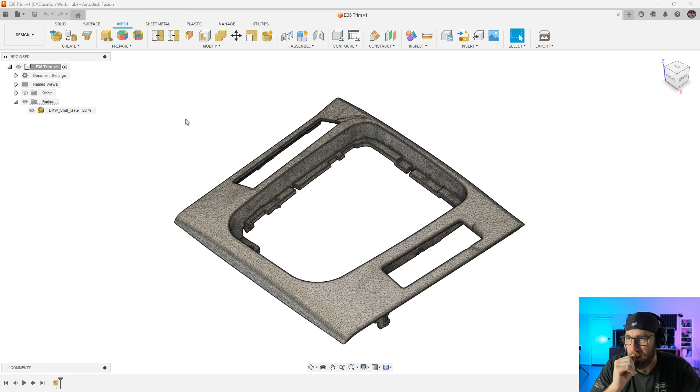If you haven't seen the first two videos, we created this using QuickSurface Personal, and the main idea here is to recreate the outside shape, basically trying to see what you would see if this was installed on the car. It goes around the shifter, and we also created the openings for the switch panels, and for the centerpiece we did some basics around it. It wasn't a full reconstruction.

The user that sent this to me is going to be 3D printing it. These pieces for E36s, as well as many old cars, just are not available, so you have to find one in good shape if you have a broken one, or if you're trying to customize it or swap in a different transmission or shifter, you have to essentially make your own. So because the goal is to recreate the part that you can see, the rest of the features are all going to be 3D printed.

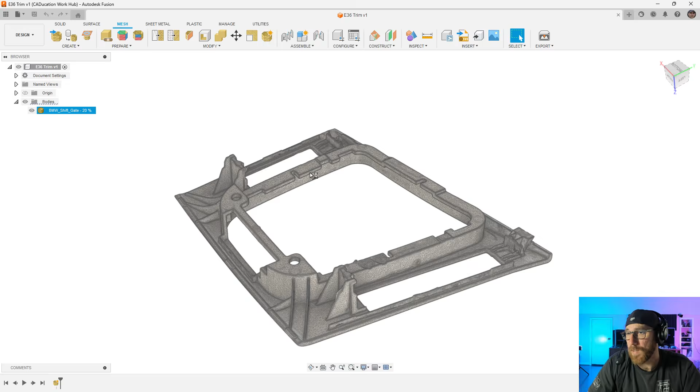We're not going through all of the ribs and the mounting features or making holes or anything like that. Most of the questions I get around this type of workflow are, one, how to get started, and two, how do we create the geometry? How do we physically make these complex shapes? Most people that reach out to me are okay with making prismatic shapes, creating a sketch, extruding, things like that, but for the most part they get hung up with the big, broad, complex curves and shapes. So that's going to be the focus of our video.

Now, for this one, if you want to follow along, there is a download link in the description of the video that has this mesh already inserted. This mesh is a reduced mesh from the one that we used in QuickSurface, so it's been dropped to 20% of the original, like 2 million polygons.

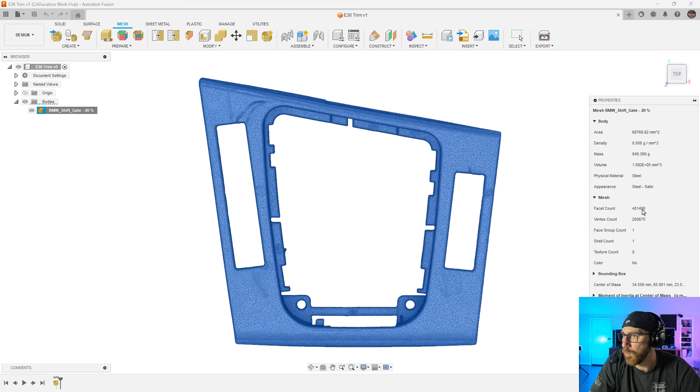And that's because it really doesn't need to be that heavy of a mesh, and since we're working in Fusion, it's much better if we have it smaller. So if we take a look at the properties, we can see we're at 401,490 facets, so basically reducing that down from the original size. It's going to make it much more responsive.

Now, if you want to, you can also right-click and make it unselectable. This will help because when we hover the cursor over, it's not trying to highlight all of the triangles. So if you've got hundreds of thousands or millions of triangles, that is really where the system gets hung up. Making it unselectable doesn't mean we can't interact with it, especially when we're working in forms, but it does mean we can't click on it on the screen.

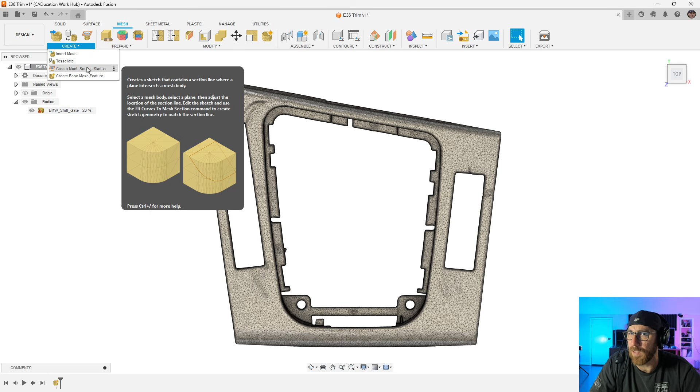The way that we're going to approach this - we've done plenty of parts with things like mesh section sketches, but we're not going to be using mesh section sketches, at least for this first part. We're going to focus on freeform modeling. Anytime I am starting with a complex part, whether I'm designing a duct, a spoiler, or wide body, I typically go to freeform, at least as a starting point, where you can snap to the mesh. It makes it so much easier, at least for me.

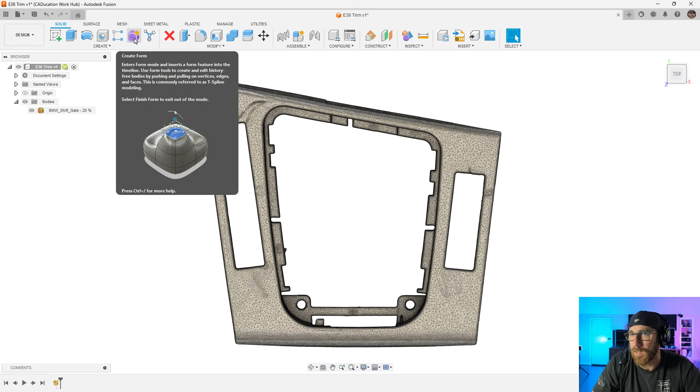You can do it with surfaces, and again, we've done videos where we've used mesh section sketches. But for this part specifically, we did it with freeform modeling in QuickSurface. We're going to do the same thing here.

So once we have a freeform body, we're going to start with the face tool and turn on Object Snap. We're going to do the same thing that we did in QuickSurface, where we're essentially looking at - in this case we don't have visualization options like that heat map we used, but we do have the density of the triangles. So we're going to essentially go out to these corners, come down to where it starts to transition, and come back over here.

All right, so this is the starting point. We're going to say, okay, this is one big panel. And while it did snap to these corners, you can see the inside is basically just a big flat plane. So what we need to do is divide this up. By default, it's not going to snap to the mesh.

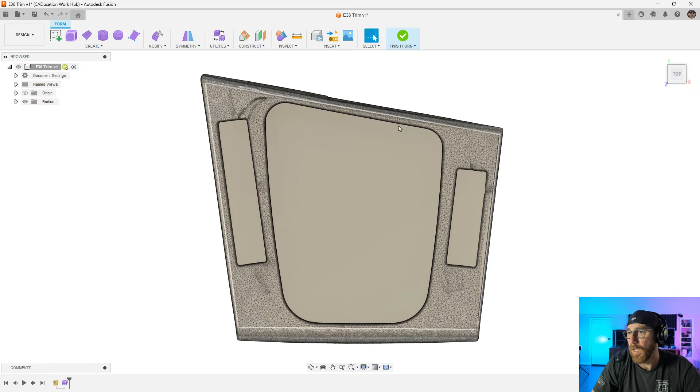We have to use a tool called Pull, and that's going to pull it to the mesh. We do have snap options when we're editing the form. You can turn on Object Snap. I have never liked the way that this works in Fusion when I'm working with meshes, so I never turn it on. You can experiment with it. It might work if you're trying to move points around very, very slightly, but in general I don't use it as a workflow. So what I'm going to do is select Modify, Insert Edge, and select this edge.

This is going to put a new edge right in the middle. We're going to say OK. Then I can use the Pull tool, and I can select these points.

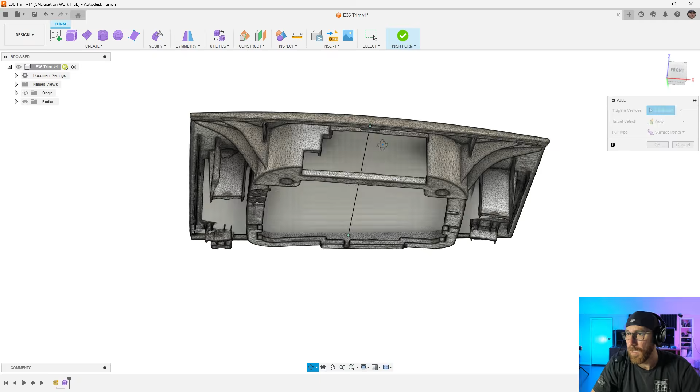Now, the problem we're going to have is the way this is designed, or the way it's divided up, it's going to snap to something underneath, and that's not really what we want. QuickSurface will automatically snap to a part or portion of it that is closest to our viewing angle.

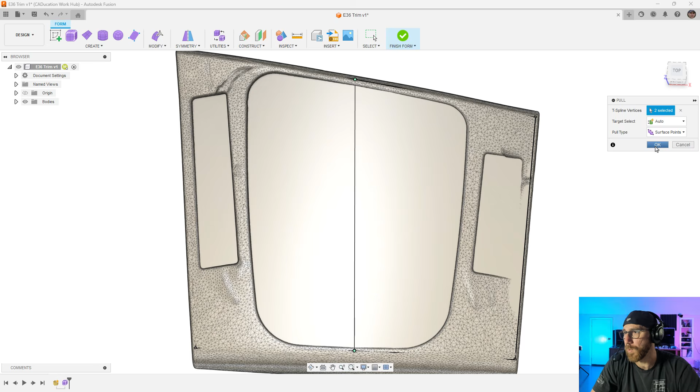Fusion doesn't do that. So what we have to do first is pull this up above, and then we can go to Modify and Pull, and it'll snap it down. Again, we want to make sure it's on the top. That looks pretty good. Another thing we can do here is subdivide.

Now, when we subdivide, we need to select a face. We can determine how many divisions we want. At this point, let's say 3 this direction, 4 in the length. Probably a bit overkill, but what I'm looking at here is it's actually giving me these points that are going to be on a section of the mesh we have on both sides.

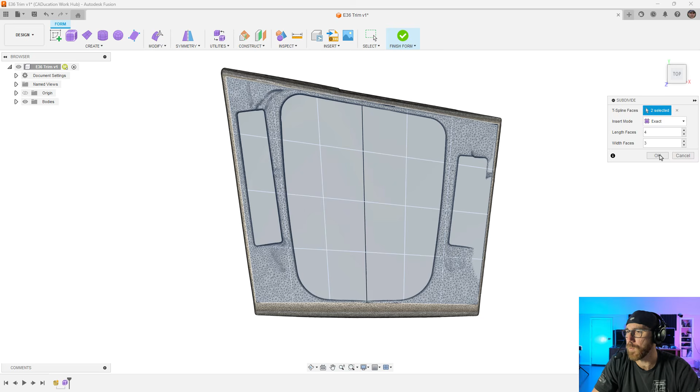Next, I'm going to go back to the Pull tool and pick the points that I want to come up to the mesh. Now, once again, this can be problematic depending on where those points are.

If they're really far below that face, we might need to go back and manually move them. In this case, it looks to be okay, but we can pull up all of these points, make sure that they're all, even the corner points, lined up. And you can do a box selection—you don't have to manually click on each one.

I'm manually clicking on them just to make sure I know where all the points are. But we can see here now we've got all the points around, and it looks pretty good. And we can say okay.

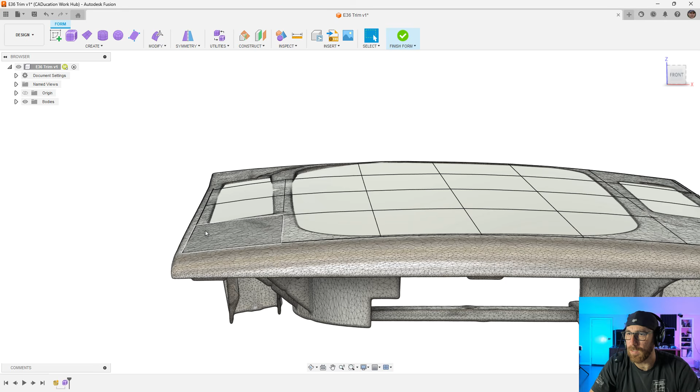Now, this doesn't mean we've got a perfect replica of the shape. You can see it's actually a little bit low. It looks pretty good here, but you can see it's low here because these points ended up snapping to stuff that's below the mesh. So what I need to do is come in and manipulate this.

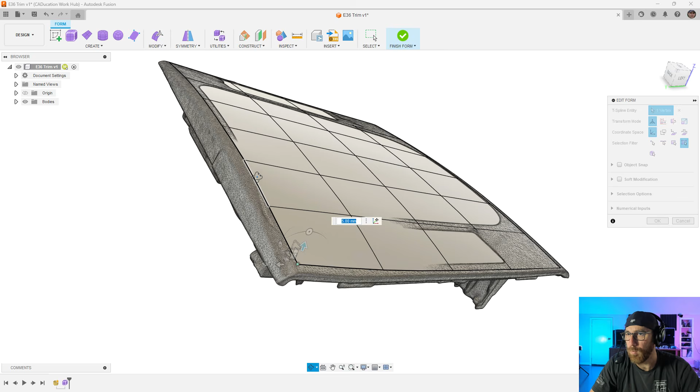Now, I'm going to give you a word of caution here. The more you manually manipulate these points, likely the further you're going to get away from an accurate representation. This face right now is pretty accurate. There's a high spot or a bump here, so it looks pretty low there, but I think overall it's okay.

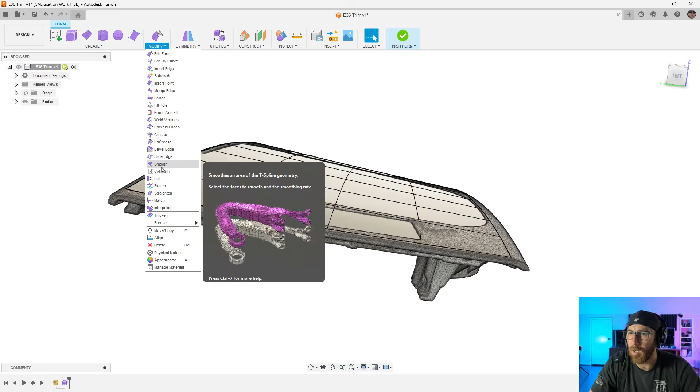But you want to avoid manually manipulating individual vertices if you can help it. You can't always help it, but it's much better to do this when you've got a lower polygon model. What I mean is if you've got fewer faces or fewer divisions, it's going to have less of a local impact on the shape.

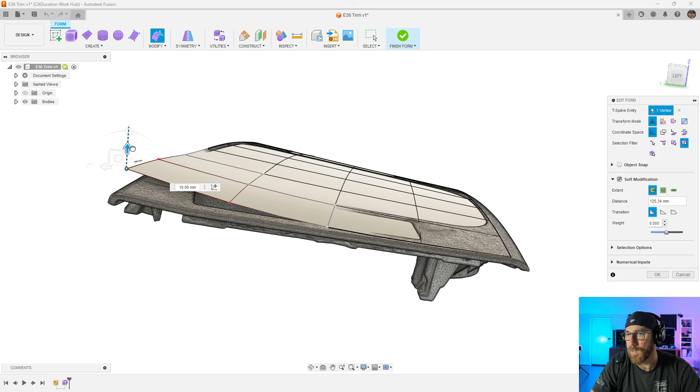Now, there are options where if you go into Modify and turn on Soft Modification, and let's say I select this vertex, it's going to change the color of the other ones and gradually move them. This is a better option in terms of keeping a gradual transition of the shape.

In general, the workflow—and I think I've done a video on this—but in general, the workflow is to start with the fewest number of faces possible, get the general gradual shape, and then add to it or manipulate it from there.

The next step is to carry on with the freeform model, unlike in QuickSurface. Part of the reason is that freeform tools work differently in Fusion. That doesn't mean one is necessarily better, but matching curvature in these corners requires a very dense set of edges, which is trickier and has a negative impact on the form inside QuickSurface. So in QuickSurface, the better option is multiple surfaces, whether freeform, a loft, extrude, or whatever the case is.

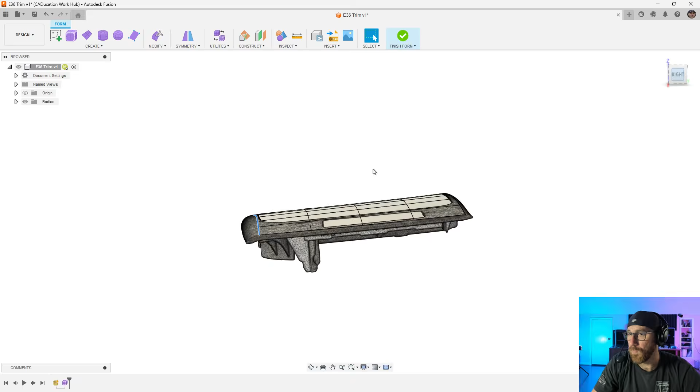Now inside Fusion, what we're going to do is select that edge, go to Modify, Edit Form, and start to extrude this by holding down Alt and pulling this edge down.

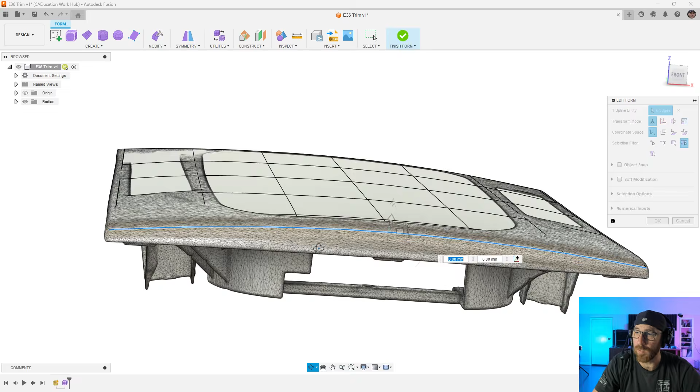Before I get too far into this, as we transition around the corner, keep in mind you're likely going to want to change the orientation of the edge, meaning you might rotate it. That's what happens in reality as you round these corners - the edges don't just slide down, they rotate as they go. This means we'll end up getting kind of far away from the shape, but we'll fix that in a little bit.

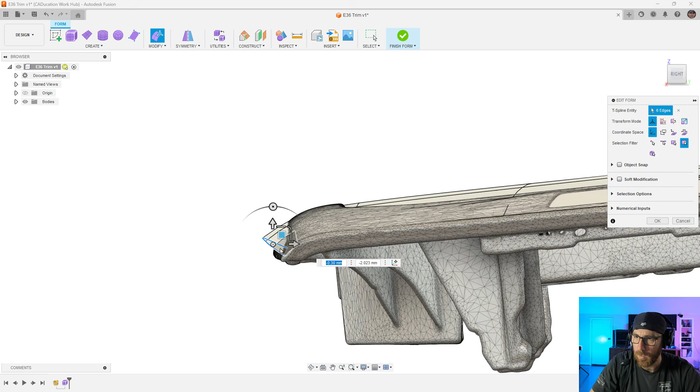I'm going to hold down Alt again, pull this out and rotate it like that, pull it down. You can see it starting to get pretty far away. So before I get any further, I'm going to say okay, and go to my pull tool.

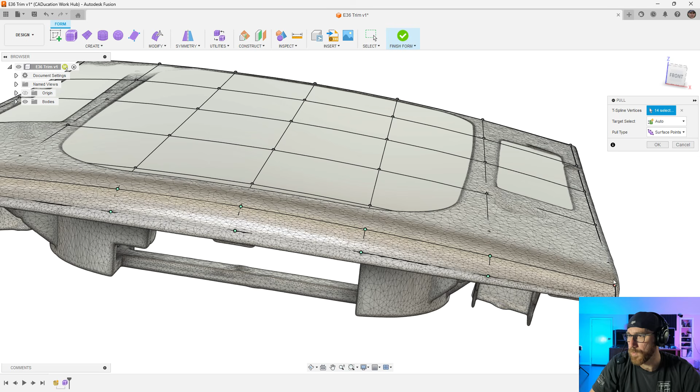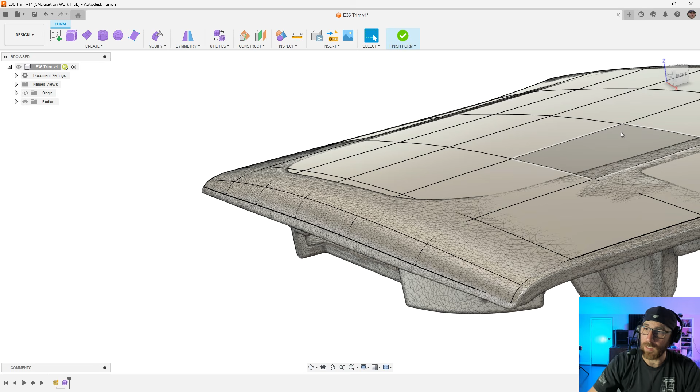I'm going to pull that as well as the second line of edges I created, so I need to find them. Hopefully they're not too far below the surface, meaning they'll rise up to the surface we want. You should also go back to the previous set of points, assuming they're still on the surface, and pull those up as well. The reason is that curvature in freeform models isn't defined just by the edges we create, but also the edges next to it control the curvature into and out of it.

So we need to go back and add another edge. I'm going to hold down Alt again, pull this one down. I'm going to use the vertical scaling to get this to be mostly flat, making sure it's outside of the mesh. We're going to say OK.

While it's still selected, I'm going to go to pull, and you can see that it pulled that down. We can also, because we added more edges, go back to the previous set and pull those out. You shouldn't have to go back more than one set of points - you can see these are still on top, but if you feel like you need to, it will adjust them very slightly. If you're trying to be as precise as possible, you can go back to those as well.

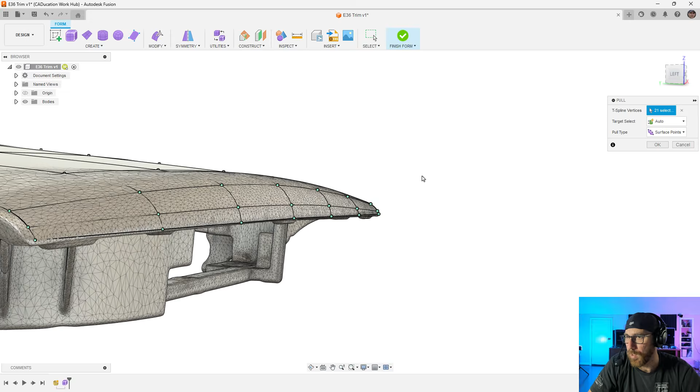We're going to say OK, and now we've got a pretty good representation. So in the bodies folder, if we hide the mesh, you can see curvature-wise, that looks pretty good.

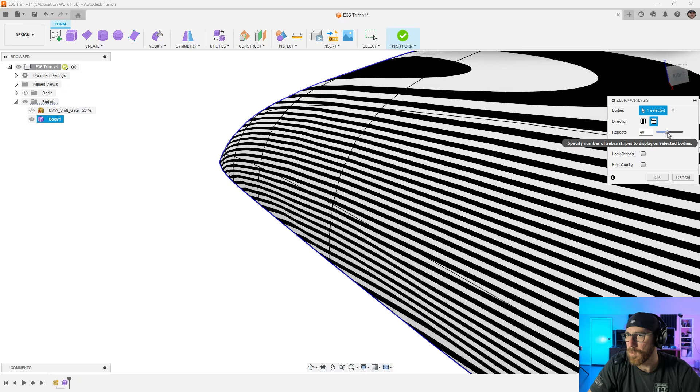So if I turn on zebra stripes, and let's flip the direction here - if we turn on zebra stripes, you can see that, let's go ahead and turn up the repeats a little bit, and high quality. You can see that there maybe is a little bit of wiggle that happens here. What I mean is when we see a narrow section and a wider section, it means the curvature is changing in those areas.

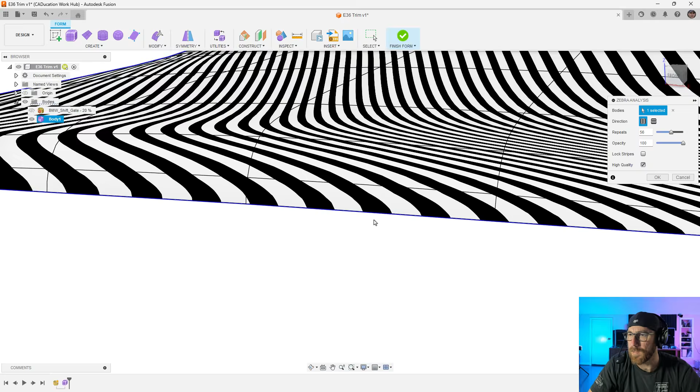We can kind of see it in this direction, but it actually looks pretty okay in that direction. I'm going to hit cancel because I don't want to keep the zebra stripes. Essentially what we're trying to do is get those edges to roll around, so I think that looks pretty good. On the other side, it's going to be a bit trickier because we've got this rounded section and then this flat section.

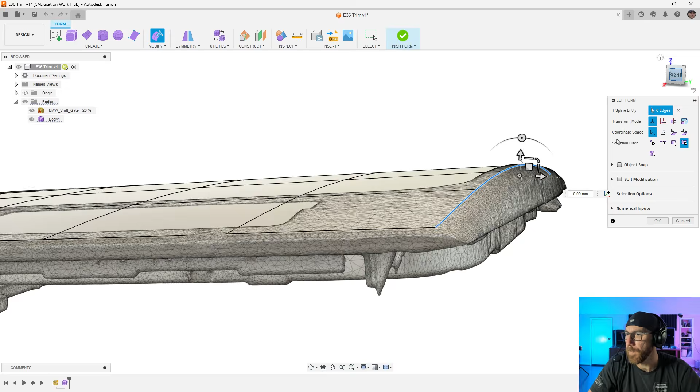So again, double click the edges, modify. This one is going to require us to do it, and we're going to need more edges to be accurate here. So what I'm going to do is start by holding down Alt, pulling this one out just a little bit, let go and hit Alt again, pull it out again, rotate just slightly, scale it a bit, and pull this down.

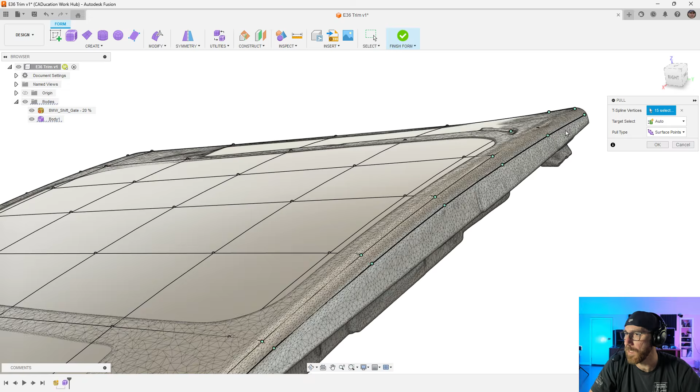Before I go any further, not necessarily required, but the more you do this, the fewer times you're going to need to stop. As we're learning and playing around with this, I find it's helpful to stop at different times through the process and just pull it back to the mesh. The main reason is because this gives us a pretty good idea of how close we are. Now, I will say that it pulled this one down into that little gap there.

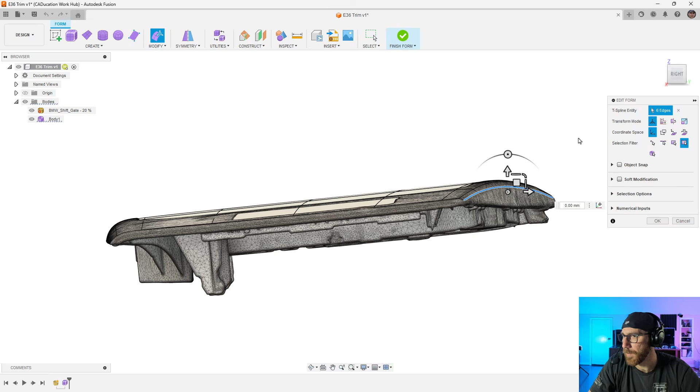So I'm going to deselect that because I actually don't want it to pull that down so far. So I'll say OK, and then double click that edge again, go back to edit form. Edit form is also on the right click marking menu at this sort of 1, 2 o'clock position up here, so if you do like to use the marking menu, it is there.

So I'm going to hold down Alt, pull this one down. Because that fillet starts to transition into more of a flat face, what I'm going to do is start to scale this and then pull it down some more.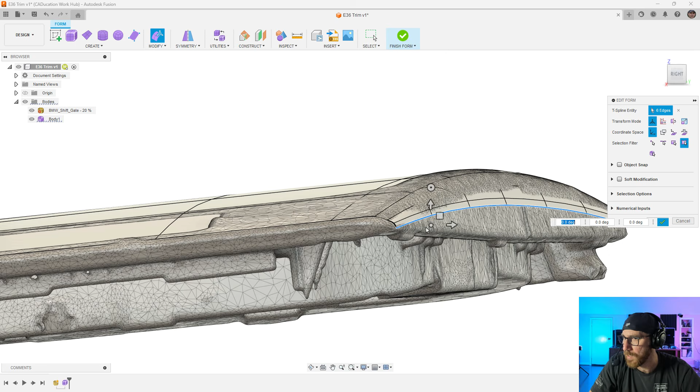Again, I'm going to hold down Alt. This one is going to be a very small change over here, so what I'm actually going to do is set the pivot point right there, and scale this down vertically until almost 0. I'm not worried about being too precise here.

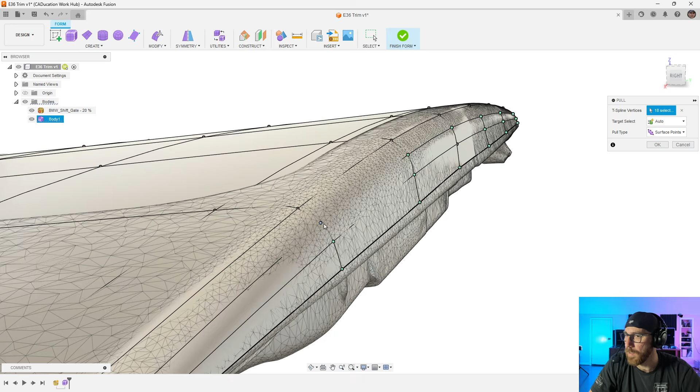But then I'm going to go back in and again use the pull tool. Now, if you use the pull tool often, it's a good idea to put it to a shortcut key so you don't have to go back into that menu all the time. But for us, it's okay to go back into the menu. It also builds a little bit of muscle memory and slows us down a little bit, so that helps. I'm going to go ahead and just grab a couple of these points.

Again, you don't necessarily have to go back this far in terms of number of edges, but it looks pretty good. Now, we could carry this down a bit further, we could move the outside edges out a bit farther, but I'm not too worried. I'm not trying to do a perfect replica of this because I just want to make sure we understand the general workflow.

If you are making a part like this, we can get 90% of the way relatively quickly. That last 10% is where all your time is spent. So if you're trying to massage a freeform model to be more accurate, or trying to get all these little nuanced features, that's really where you spend most of your time, and this is true whether you're modeling an entire car or just a part.

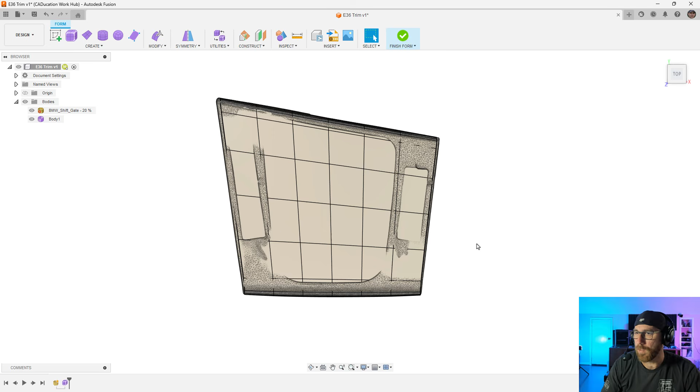You could spend, just in a general sense, 2 hours to do the entire outside of a car body, and you could spend 200 hours doing all the details, the trim pieces, adding the details for a grille and all these extra features. And I'm not even talking manufacturable, I'm talking basic stuff.

All right, so before I go too much further, another thing that I like to do is when I have a general freeform shape, because remember these are direct modeling, what I generally do is copy and paste it. So Control C, Control V. So if I need to try to subdivide this more, extend it out, or thicken it, I will do it on a copy, that way I always have that original.

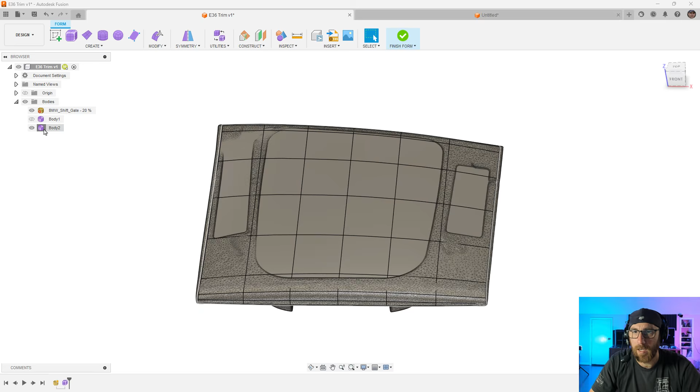Now, if you end up making changes to this, you can always add another copy, delete them, whatever you need to do, but that's a good option here. Another thing to note, which is kind of helpful: if you have this body here and you copy it while in another design inside of a freeform model, you can actually paste it into a new design as well.

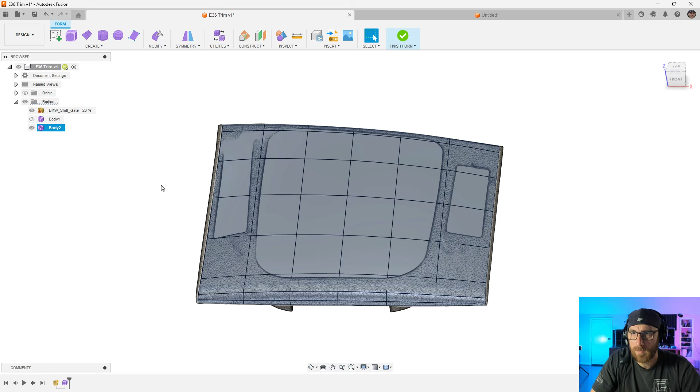Again, because these are just bodies with no history, even though it's a feature in the timeline, you can take those freeform bodies, copy them, and paste them into a new version, a new file completely. So that can be pretty helpful in some cases. Most cases, it's not super duper helpful, but in some cases it can be.

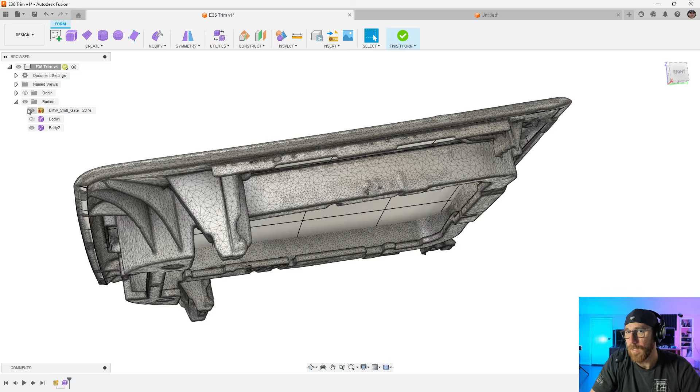All right, so I'm going to go to modify and thicken, and I'm going to thicken this inward. Let's go ahead and do 3.7. You might be thinking, why would I thicken it here as a freeform model instead of thickening it as a solid body? Well, the big reason is when we thicken stuff like this, the corners are going to start to overlap. And when we do this as a surface in the design workspace, we don't really have good control over what's happening on the inside.

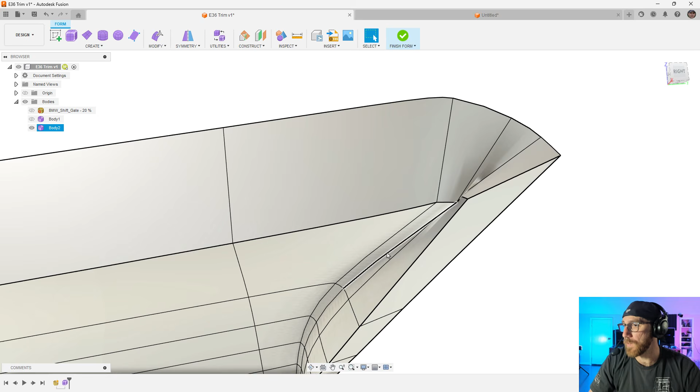Because I know this part is destined for 3D printing, I can actually select edges. So for example, this edge, let's go over to here, Control, double click that and hit delete. That will allow us to remove edges on the inside. And let's go ahead and move this edge, maybe move this edge down a little bit. And then let's go ahead and move this one. And so what this allows us to do is make the curvature work.

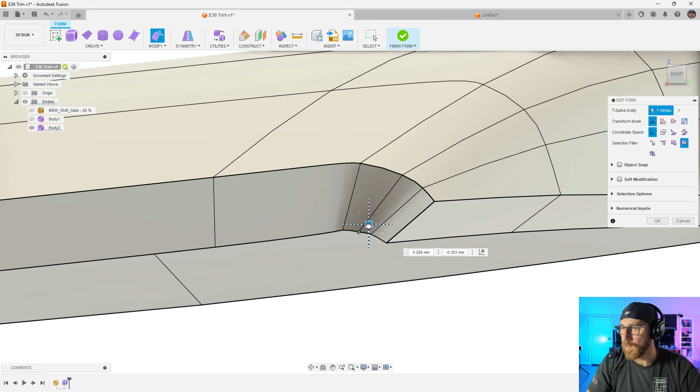So we can make adjustments here. Let's go ahead and pull these down. It's also good to go into box display, so that's Alt and 1 on the keyboard. This can really help when we're trying to sort out the curvature like this. Go ahead and pull these down and go back into smooth display. And so we can work with it so that we don't have these areas where it's pinching in those corners.

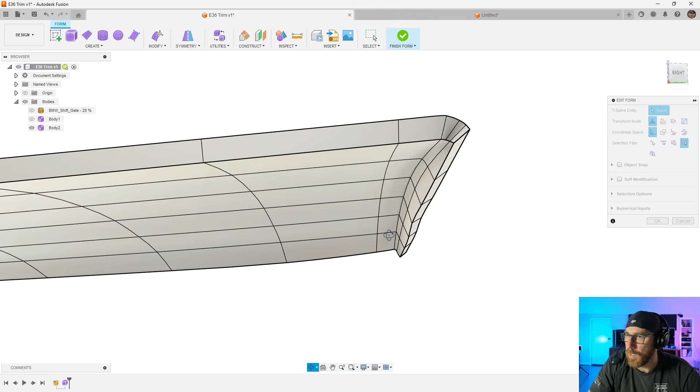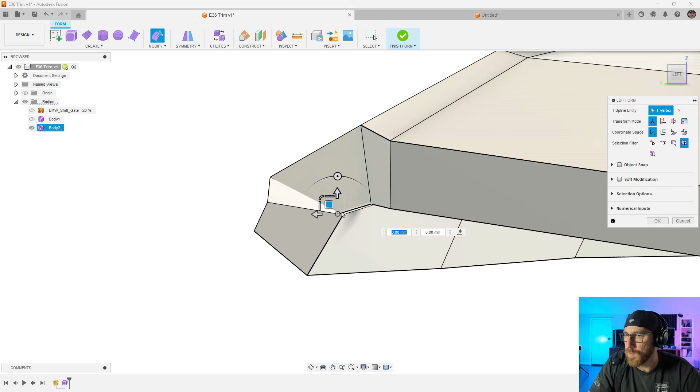And that's something we can do on the other side as well. So I'm going to come over to this side. I'm going to go back to my box display. Again, box display, this is a really good skill to learn, modeling in box display, because this can really help find some of these potential issues just based on the way that it looks in box display.

So I'm going to go and pull that one out. And you pull this one up a little bit. And then in smooth display, we can see it looks pretty good. Now there are some issues like with this. Now in reality, this actually rolls under like a fillet on the real part.

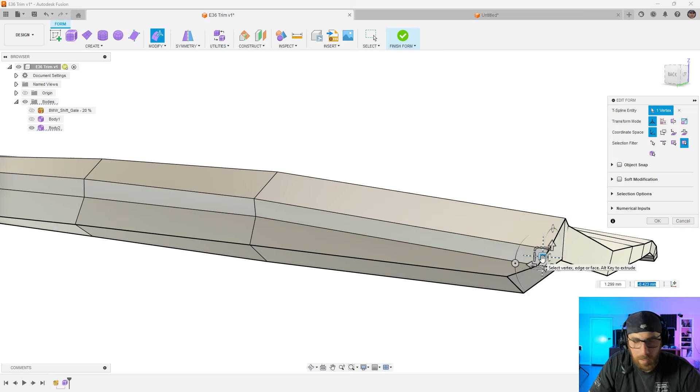And so that's something we can also do here. Go ahead and pull this in. Again, go box display. Box display will really help highlight where the edges should be. Go back to smooth display, and it looks pretty good.

Now this is a creased corner, so we could actually go in and apply a fillet there. Now, if you really wanted to, what we could do is select that and uncrease it and round it off. And so that way we could have a smooth transition of that shape.

So if you've got the mesh model here, and again, I'm kind of inside where it is, but if you've got the mesh model here and it does round off in that orientation, then you can do that. In this case, I'm going to do Control Z and undo and leave it sharp, and I could put a small fillet on that corner when it converts. But that's why I wouldn't thicken as a freeform model, because the radius of curvature in those areas will oftentimes lead to issues when you thicken, because it'll bunch up in those corners.

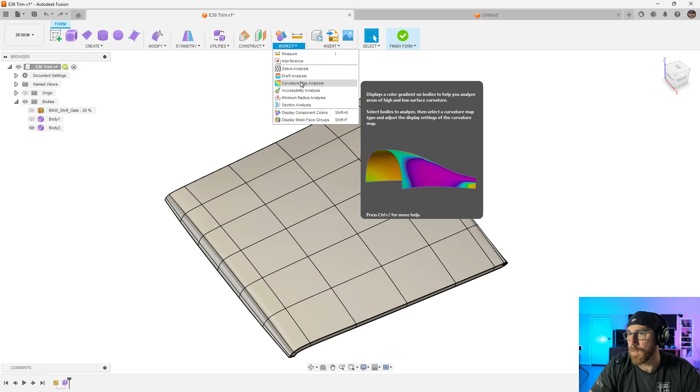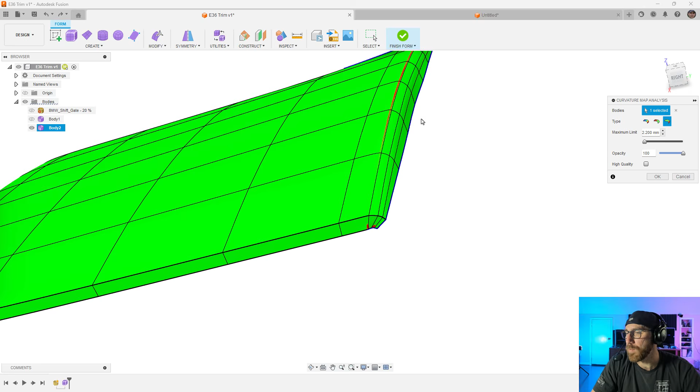And I get a lot of questions like, how do we know this? How can we figure this out? Well, if you go to Inspect and Curvature Map Analysis, and you go to the Principal Maximum, so if I set this to 3.7 millimeters, at 3.7 millimeters, we can see red in these areas. And these are the areas where it bunched up when we thickened it, right? Below 3.7, if we went to, let's say, 2.2, that would, in most cases, be perfectly fine and not produce any issues. There's a little bit of red on that corner, not a big deal. But you can see here, really just right on the peak of that is where we might potentially have problems.

And so this is the tool that I use to help find that stuff. And you can kind of figure out what thickness you can get away with. Now, in reality, again, you need to spend time making sure all these models are smooth.

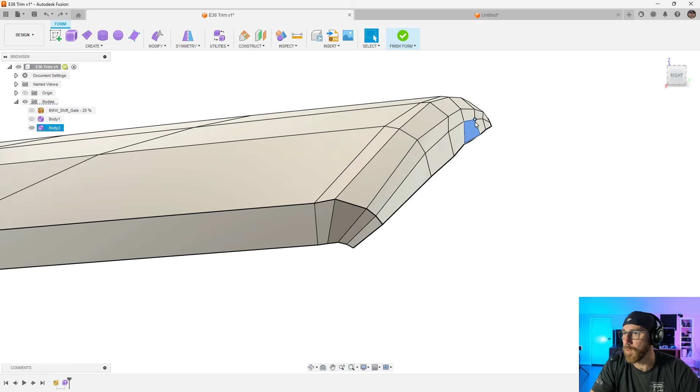I didn't spend a ton of time making sure that the curvature was really nice in this area. So when I look at this in box display, I can see all sorts of problems with these edges, kind of coming in, then back out. In reality, I would want them to be a little bit smoother of a transition. And when I look at it in smooth display, that looks a lot better.

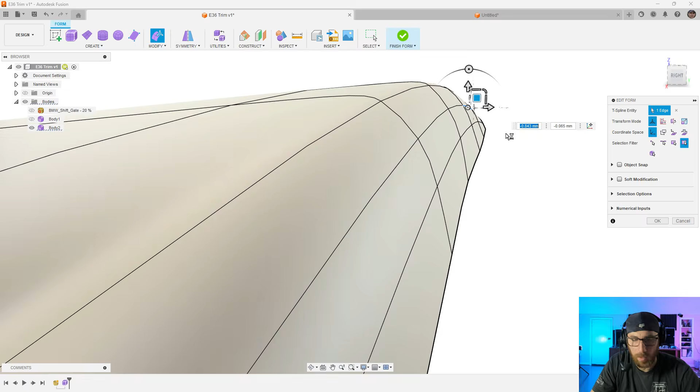Going back and forth, understanding how box display works, and being able to make these changes and manipulations to your form, that's going to be the way you get good quality geometry and good quality results out of these freeform models - spending the time. In reality, I would do this before I thickened it, but just for the purposes of this video, I'm not going to spend too much time trying to get it perfect.

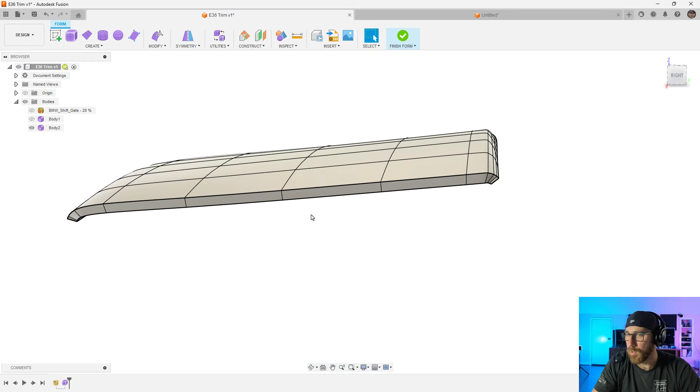This is that 90%, or maybe even 80-20, where you can get pretty far quickly. But once you start to dive in and really try to hone in and highlight the good geometry, good curvature, and make sure these transitions are all good, the thickness is nice and consistent - that is really where you're going to spend all of your time making these kinds of models work.

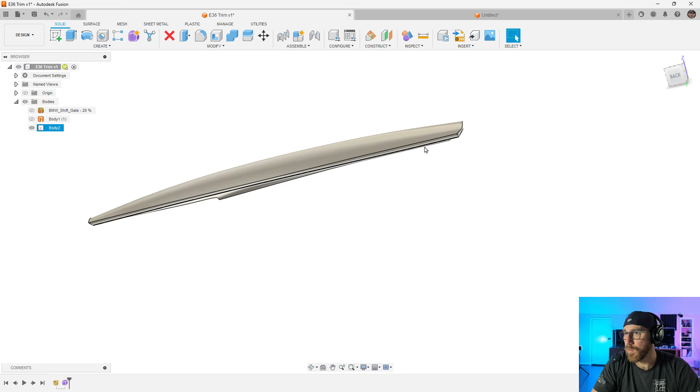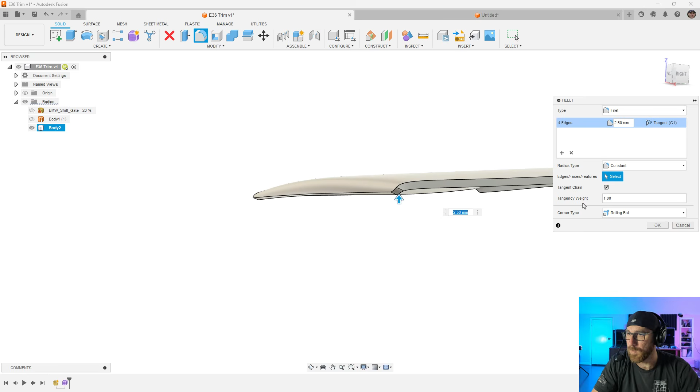All right, so now I'm going to finish the form. I've got a surface body for the top, because we copied and pasted it, and a solid body that was the thicken. So if I wanted to, let's say I left that corner kind of messed up - if I wanted to apply a fillet there, I could do that. If we needed to round off that corner, maybe this corner as well. Within reason, obviously there will be a point where some of these things fail, but you can see we can round those off, and that helps smooth it out.

Now, in terms of the rest of the model, this is again where we have to look at it and figure out how we want to approach the geometry - whether it's an extrude like we did for QuickSurface, or if we want to make a freeform body snap to the inside of that, which takes quite a bit longer to do, but you could do that. You can also eyeball it, depending on what's going in here, how the shift boot fits, and all that kind of geometry. You might get away with quite a lot just by eyeballing it and getting close.

Now, that's not to say that in reality, in production manufacturing, you would do that. No, that's certainly not the way you would approach it. But if you're trying to make a custom part for 3D printing, making it fit the outside shape is the most important thing, and then the rest of it is you customizing, figuring out what you want to do.

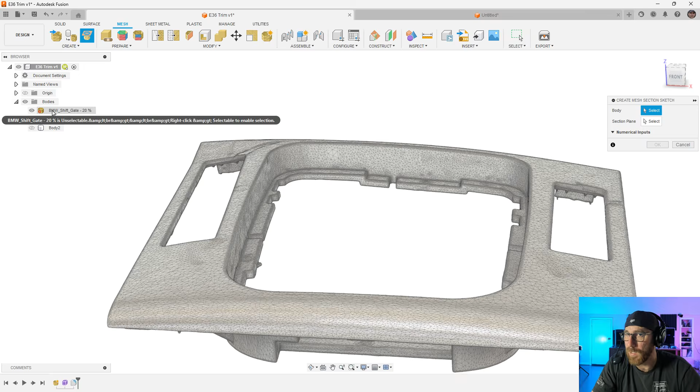Now, the rest of the process is relatively the same as we did. I'm going to go ahead and make a mesh section sketch. Again, we can't select the body on the screen because we made it unselectable, but you can select it here. The plane that we're going to use - I'm going to select the top plane, and pull this up just like we did in QuickSurface.

Now, this could be a problem based on the orientation I have my part. You can kind of see it's tilted up based on that bottom plane, so this isn't going to work unless I rotate the plane, which I can do directly here. And then again, what I'm looking for is basically a good, clean sketch. So I'm going to say OK, and it's going to create my mesh section sketch.

We don't automatically go in by default and edit - we have to right click and edit the sketch. I'm going to hide the mesh. I don't have a good way to clean this up, but we do have the option to fit curves to mesh section. So what I'm going to do is start with a line, and snap a line from there to there. I don't really have a good reference down here because, again, it's kind of missing.

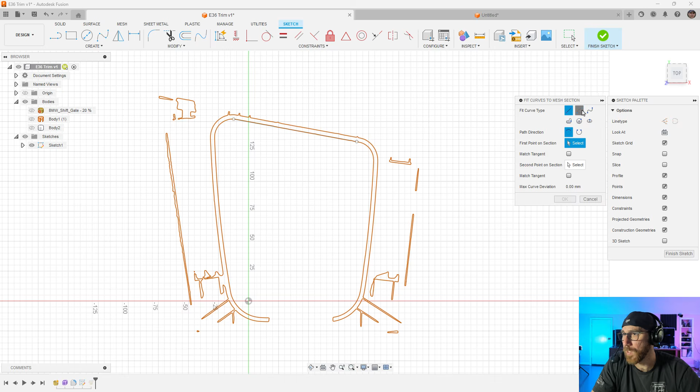But what we can do is fit an arc if we want to. So, for example, let's say arc - I'll go from maybe here to here. You can see it fits in the corner.

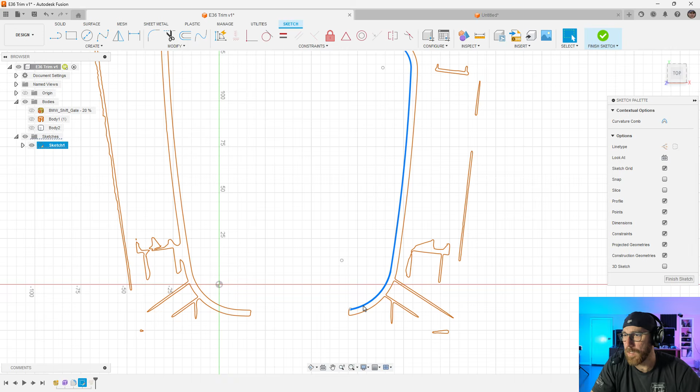And then now we've got that big arc. So basically fit to there, fit to there. Now, from here, what we're going to do is say OK. And what we've created is, let's double click that.

So now what we've created is essentially this. We don't have tangency, so if we need to add tangency between these, we want to add them. And then we can go back to fit curves. Again, what we'll do is an arc from here to here. We'll come back later and connect those together.

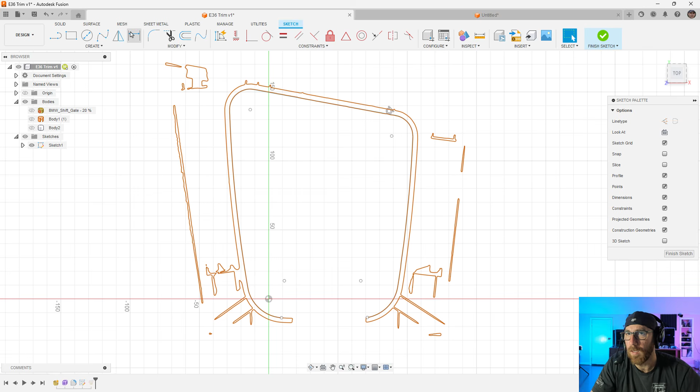Arc to there, arc to there. We'll say OK, and then the rest is a straight line. I'm not going to snap it to the mesh, but you get the picture. And then again, you can come back and let's hide the mesh section.

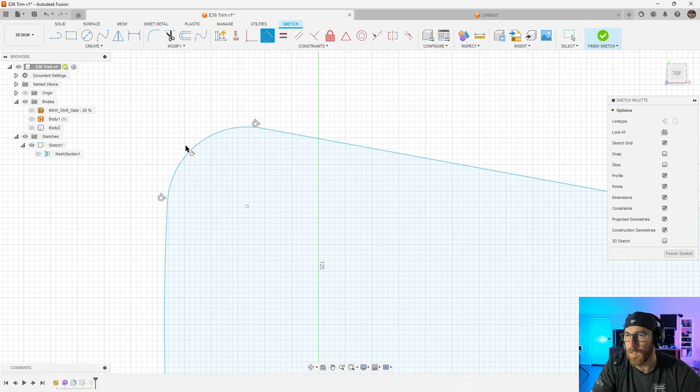And let's make these two connected, and we'll make them tangent. Make sure that these are tangent. So you can see it's not automatically applying the tangency, which means we're likely going to have to make some adjustments. So if we bring the mesh section sketch back, you can see once we applied the tangency, it kind of changed things.

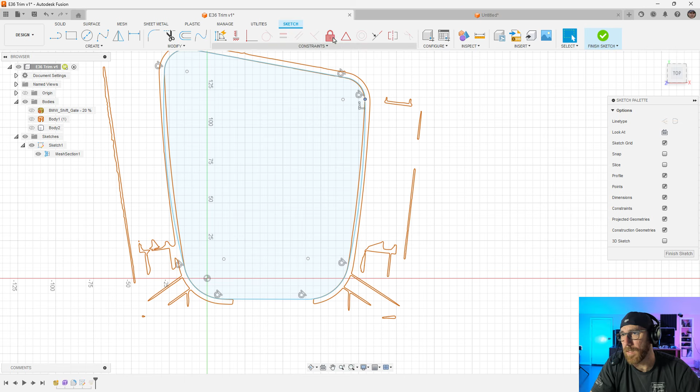The way that I would approach this in Fusion is I would find a point like this and fix it. Then from here, I would start to manipulate the arcs if possible, either manually dragging them or with dimensions. Now it's a little tricky because of that tangency.

So let's go ahead and unlock that, and maybe let's pull this. Let's go ahead and pull this back. Get it close. And this is an area, again, where I think the process is much easier in QuickSurface than it is in Fusion, because once these sketches start to get messed up, it becomes really hard to do. So go ahead and pull that up and maybe give this a dimension.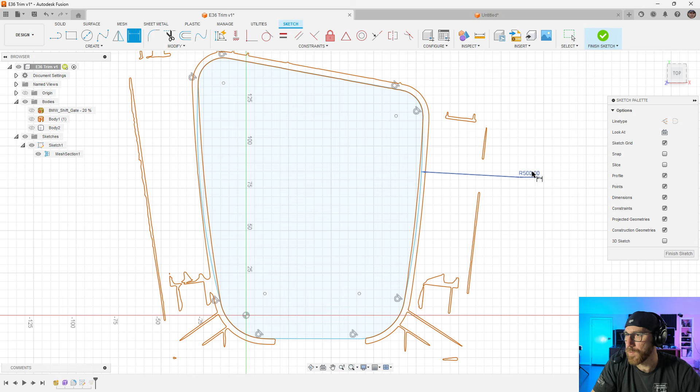So let's say 500, see if it gets it closer. Let's try 600. All right, so 700 is a bit closer. This one's probably the same or similar. I know it's not perfect, but again, that last 10, 20% is where you spend all your time. I think this is close enough for what we're doing.

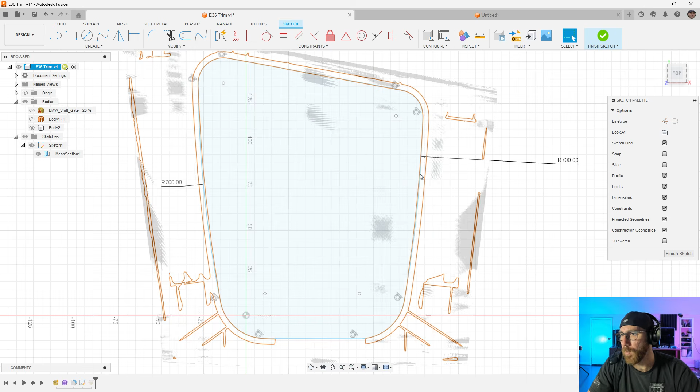What I'm going to do from here is offset this. So we're going to come out, again, I'll just do 3.7 millimeters. Because Fusion does pretty good with selecting profiles, I don't need to make one construction or anything like that.

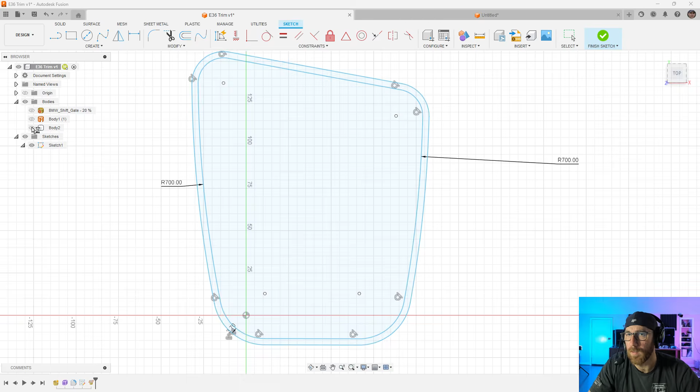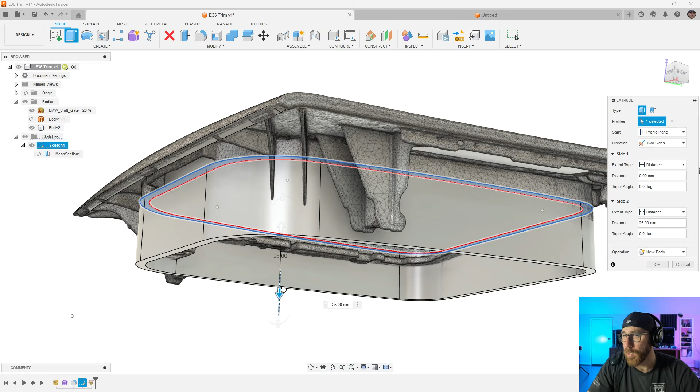But we will hide the mesh section, go back to our solid tools, show the mesh, and then we're going to extrude. All right, so we can go about this the same way. Let's do two sides. We can go about this the same way we did before, where we created a solid and start to kind of hack it away.

Or what we can do for side one is we can say to object and extrude it up to the object. We can make it longer than it needs to be on the bottom, and join them together. Because we still have this sketch and we're not worried about draft and things like that, we can use that as a cut. And if we hide the mesh, you can see now we've got that sort of inside piece.

And the other stuff, again, it's kind of the same. You bring the mesh back. We create a standard sketch, so we don't need to do a mesh section sketch for this. You can use a 3-point rectangle. So for example, here to there to there.

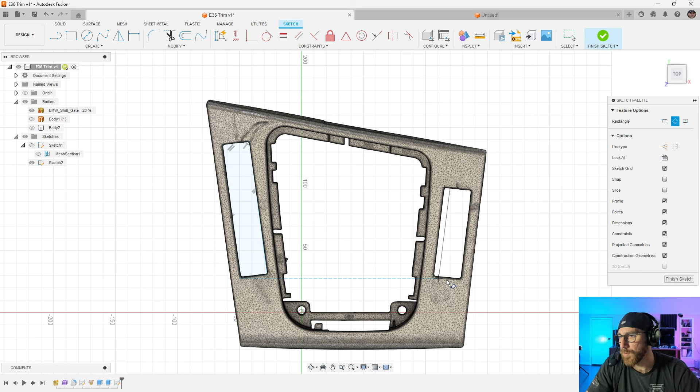Do the same thing over here. Actually, let's go down here. I'm going to hold down Control to temporarily override constraints, and then E to extrude, hold down Control, and we'll just pull those all the way up through. And there we go.

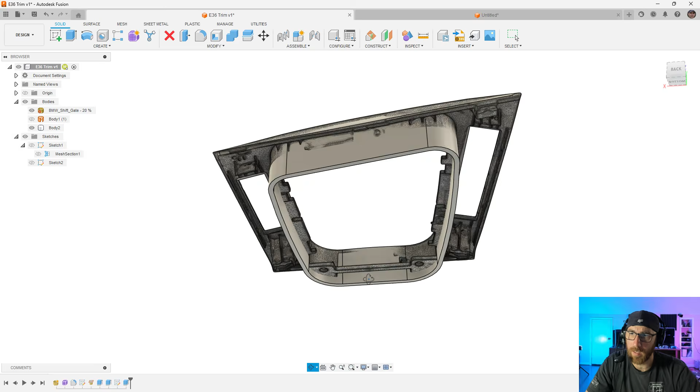Again, we can go through a similar process. I don't think it's really worth the extra time, but trimming this away, adding the little tabs and so on. So again, these end up being fairly basic features in Fusion. Most of the time when people are asking questions, they're not asking about creating an extrude and a little rib or a tab. They're asking about creating the complex shape on the outside.

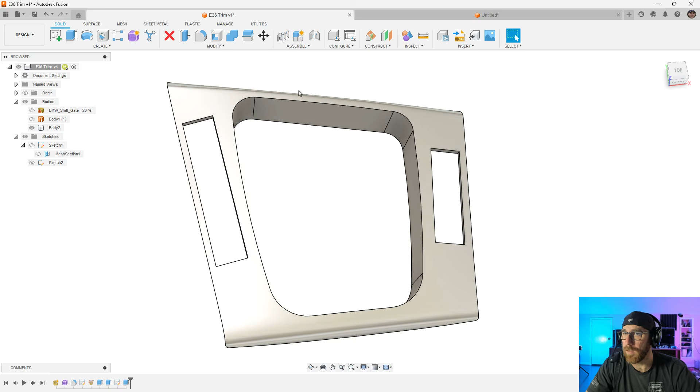So I think that's as far as I'm going to take this part. From here, we spent probably 30 to 45 minutes actually modeling it in QuickSurface. Obviously it could be a little bit quicker without narrating. In Fusion, we're 30 minutes in, roughly the same point, but we did a bit more with freeform and less with surfaces. We actually didn't do any surfacing. So that has an impact on the overall time.

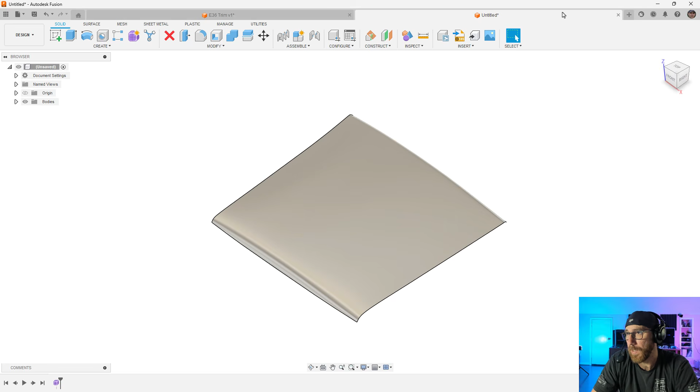Now, there are, of course, big nuance differences between the tools. And so a couple of things that I do want to mention is mesh section sketches in QuickSurface.

God, this time of year.

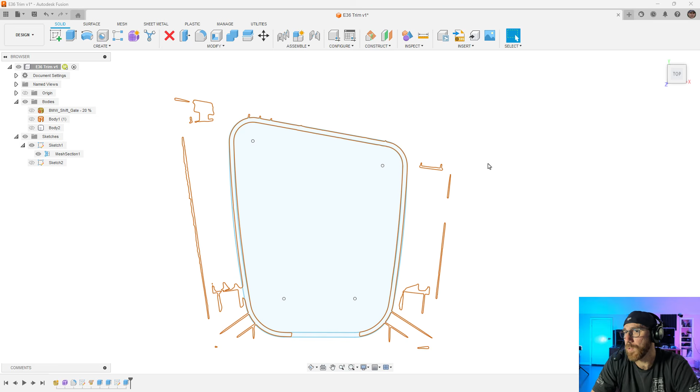Mesh section sketches in Fusion are there and available, but they are much easier to use and more robust in QuickSurface. When we're looking at trying to use sketches, specifically mesh section sketches, we're looking at using the data from those. In Fusion, the data is more general than it is directly used. We can do straight lines, arcs, snap to meshes, but once you get to actually using splines or curves, definitely don't use that in Fusion. It's not going to produce a good result. The quality of the spline is going to be awful. So definitely don't use it.

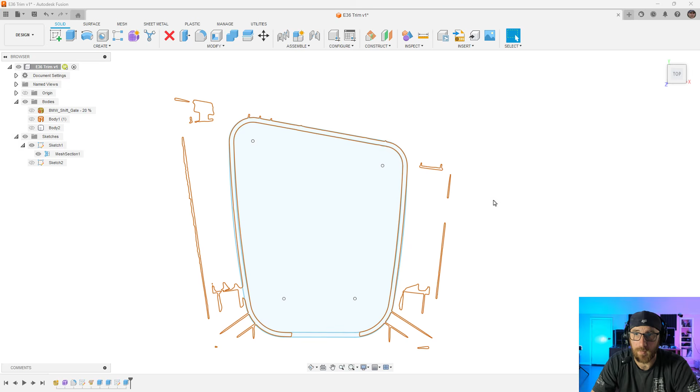Straight lines and arcs are fine as long as you can get it close to the mesh. In most cases, I use mesh sections more generally in Fusion, where I use them more precisely in QuickSurface. For freeform modeling in Fusion, it is more of a manual process. You don't have an analysis tool to tell you how close you are. You don't really have the same level of moving things around and snapping them to the mesh. So those on-the-fly manipulations are much easier and more robust in QuickSurface than in Fusion. I think Fusion is a better freeform modeler. So if you're trying to create a design that happens to snap to the mesh, but mostly the design is new, then Fusion has, in my case, benefits over QuickSurface for those types of modeling applications.

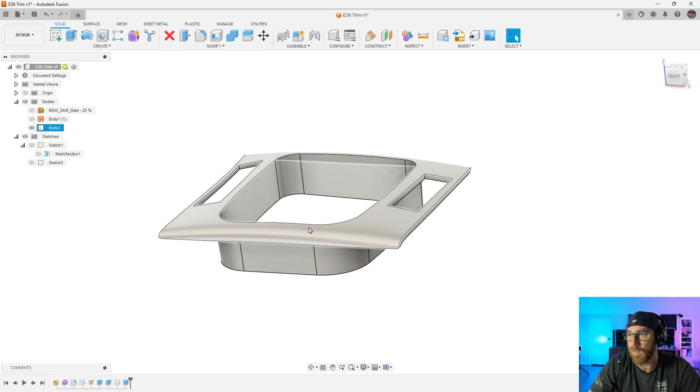QuickSurface is not claimed to be a standalone CAD program. That's not the intention. But this is kind of where I see the differences, and I get asked these questions all the time. For me, QuickSurface is really good at extrapolating the data from the meshes, where Fusion is good at generalizing the data on the meshes, but creating new geometry that fits to it. That's kind of where I see the differences between those.

Hopefully these two videos helped understand the process between QuickSurface, in this case Personal, but the process would be the same if you're using Lite or Pro, using the same manual tools. So the manual approach that we did in QuickSurface Personal would work in all three versions. If you are trying to use some of those Sketch Assist tools or auto freeform tools, those are not available in Personal. They are available in Lite and Pro. Different versions of those tools are available. But the manual approach, again, is going to be the same no matter which version you're using.